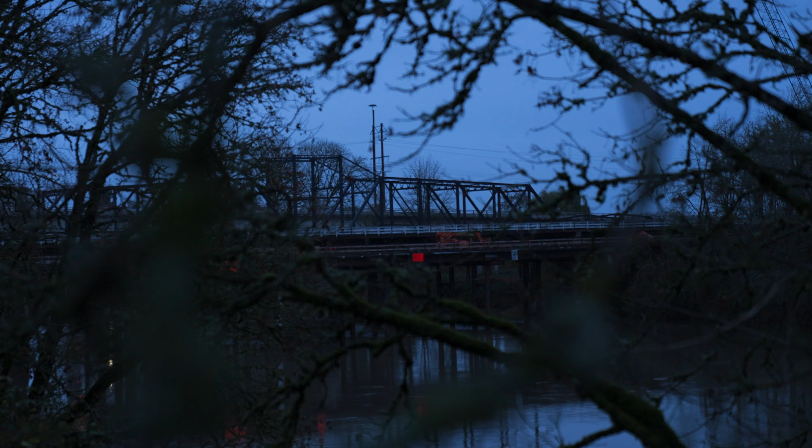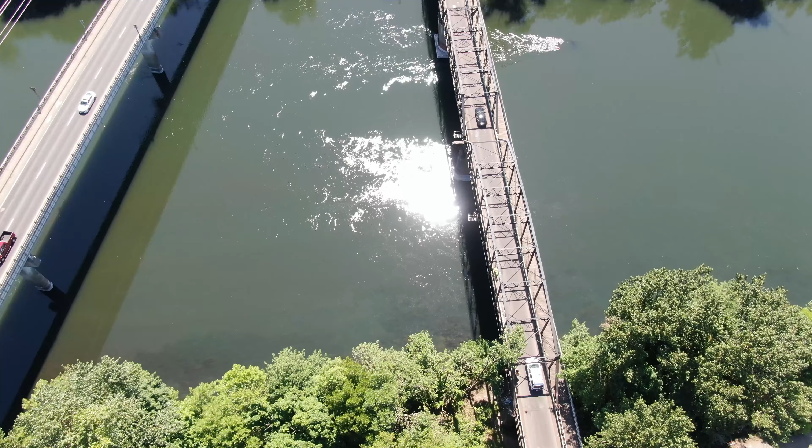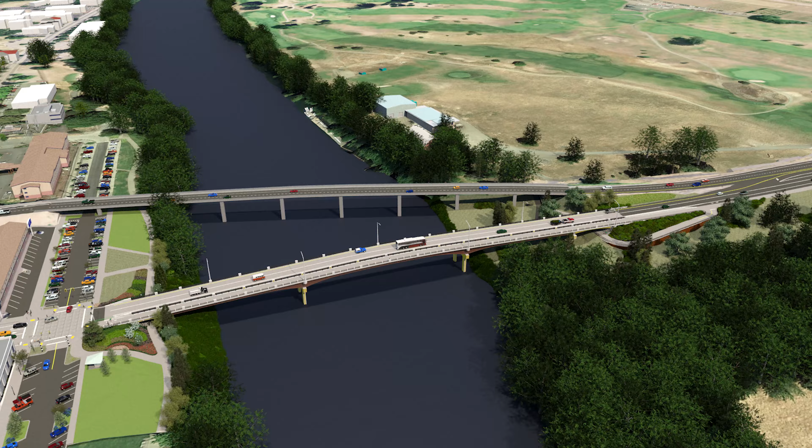When you're considering how to treat a historic bridge, I think you really need to start with what is the goal? What are you trying to accomplish? You have to start with, does it need more lanes for capacity to increase that opportunity value? Does it need a seismic retrofit in order to provide that security because it's an emergency route? Does it need more pedestrian facilities because it's providing connection?

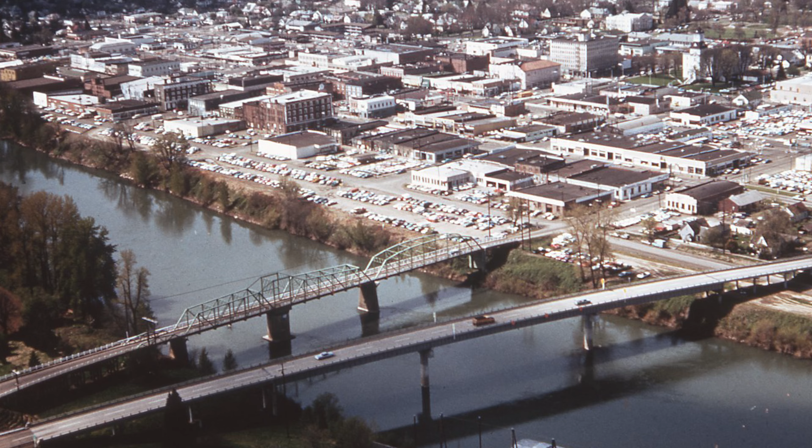You have to consider those things, but you also have to consider the value of it in its current, like what it looks like and what it means to the community, because that's part of your goal. Can you maintain that feeling in doing all those other things? And sometimes if you have to do all those other things, they just become so overwhelming that by the time you'd finished, you would have lost that feeling. And if you've lost that, then were you doing the right thing?

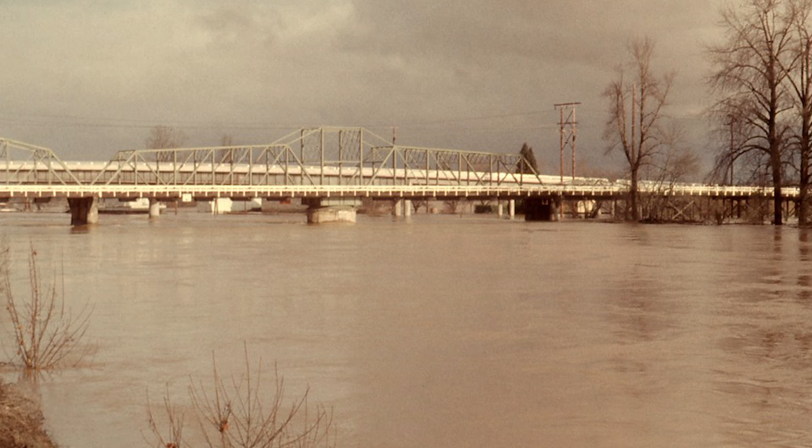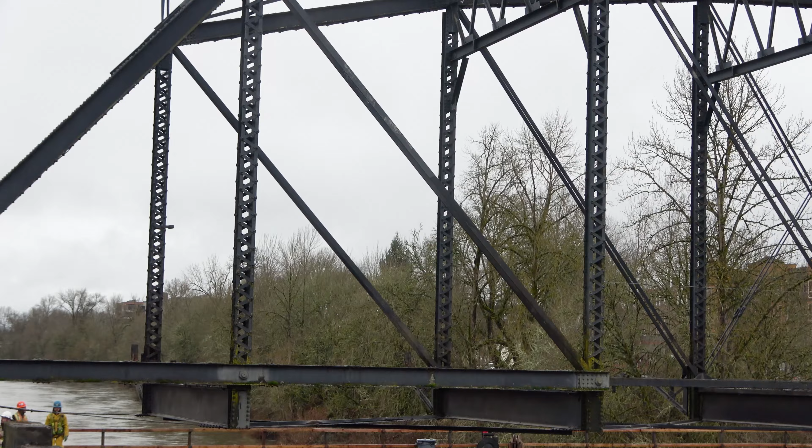The Van Buren Bridge, unfortunately, is made up of non-redundant steel tension members in some of those web diagonals, as well as the bottom chords. That design makes this bridge type a lot less resilient. Couple that with the west span, which has tension eye bars in that bottom chord, and together these make the Van Buren Bridge particularly vulnerable. If any one of these members were to fail, the entire truss span would more than likely collapse.

Trying to match that today, working on a historical side, you start to lose, you can't recognize the bridge as a historical bridge in the same way it was. And ODOT really took the effort to say, what would it take to take this bridge to make it seismically stable? Now, that also brings in the question of how much life do you get out of a bridge of this age to begin with.

So the challenge too, I think this was recognized by us, and I think largely recognized by the public and the community that we're working with, was that to make this thing continue as a vehicular bridge is really a fool's errand, because it would take so much work, and then you'd be only maintaining one lane.

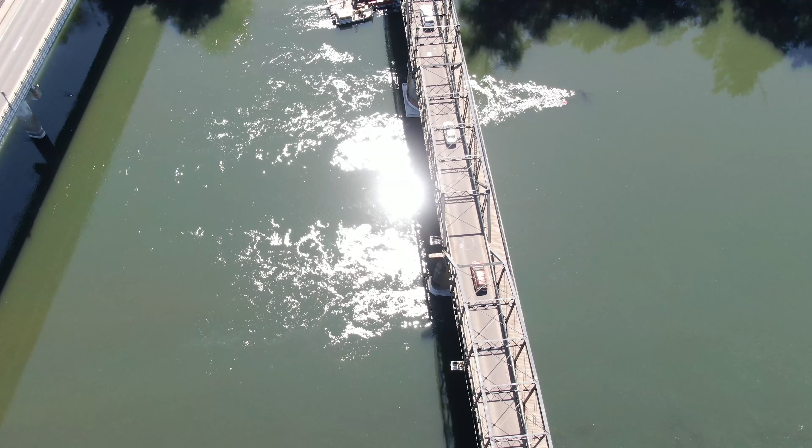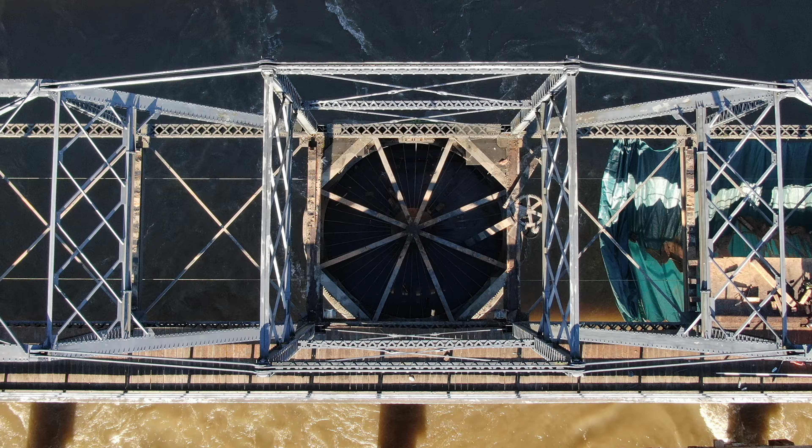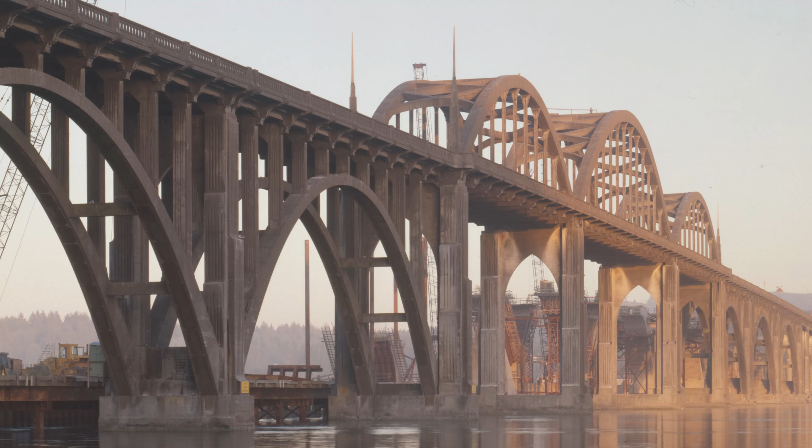The last time they tried to open it was in the early 1970s. So it's a swing span. The Coast Guard was saying, you need to be able to open this bridge on request within, and I think at that time it was a month. Okay, we're gonna test it out. They jacked up the ends, they started twisting it, and it immediately started to sag. And they ended up having to get a crane out to lift the ends back up to torque it back into place. And at that point, they took out the original bearings and fixed it in place and negotiated with the Coast Guard.

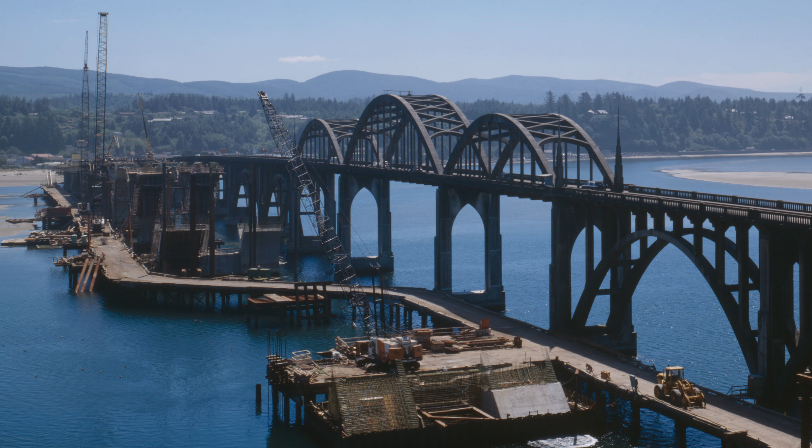ODOT has a preservation crew because of the loss of Alsea Bay Bridge back in 1991. We did a bunch of research and discovered this cathodic protection scheme that uses electrical currents to reverse the corrosion in a reinforced concrete bridge, like Alsea Bay was. They found the technology and started dabbling in it, but it wasn't in time to save that bridge.

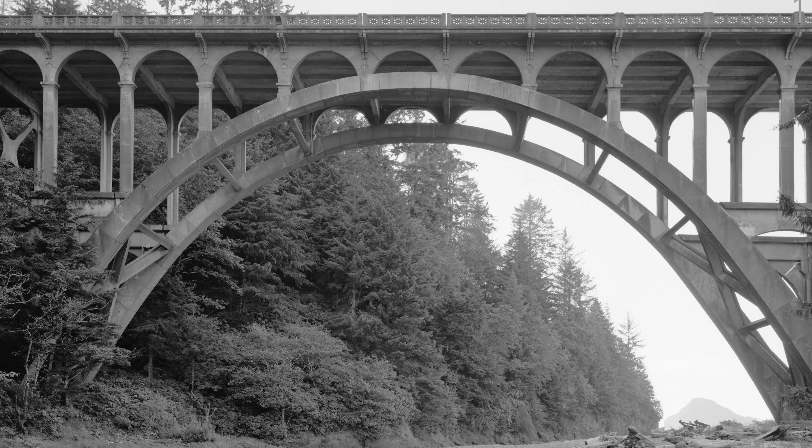But at the same time, they also started projects like Cape Creek Bridge just north of Florence, and actually executed that one perfectly, and that started basically the saving of all the other coastal bridges other than Alsea Bay, all of the ones that were designed by Conde McCullough. They're big and they're expensive and they're valuable both for historic purposes and also just for people to use and to get around.

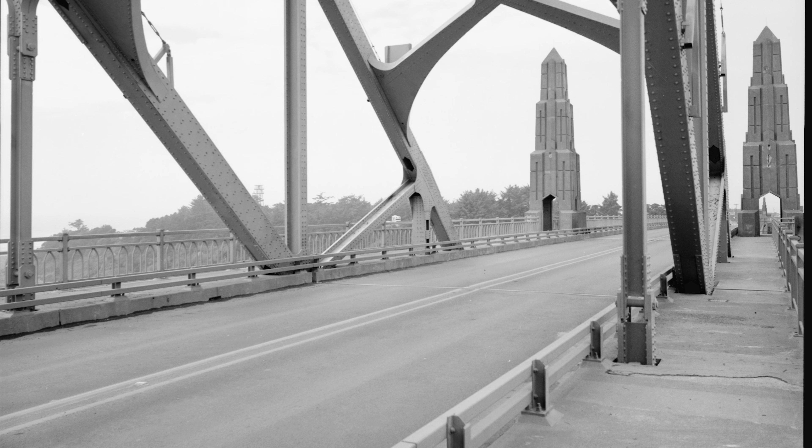And so, we may spend $30 million doing the cathodic protection on one of those big bridges, but replacement might be $1.5 billion. The purpose of that crew is sort of twofold. It's the historic mission, but it's also just economics.

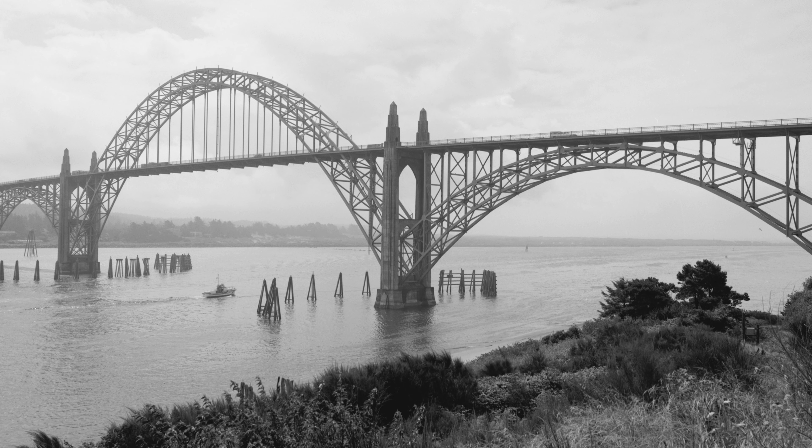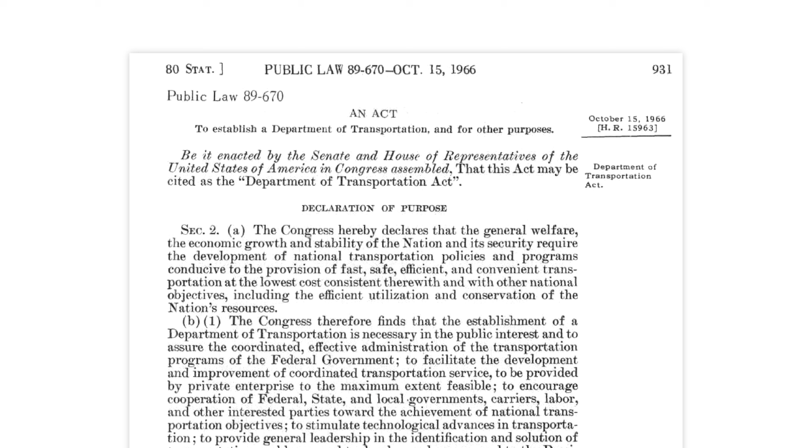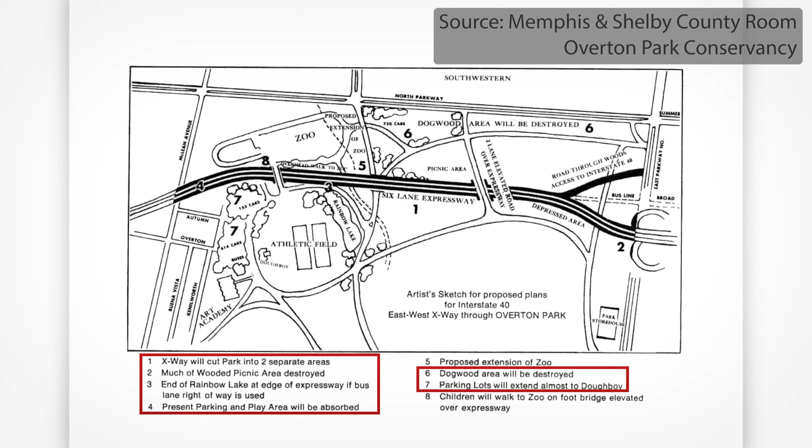The Department of Transportation Act of 1966, which essentially set up the DOTs, included a Section 4(f). This was signed on October 15th of 1966, where they recognized at the time there was a lot of hubris going on with the transportation agencies that were sort of blowing through downtowns across the United States, and they weren't really considering effects to downtowns, and they're sending interstates through cities. And so there was this pushback at the time to really look at what are we doing as a transportation agency to the historic fabric of our country, and what can we do to change that?

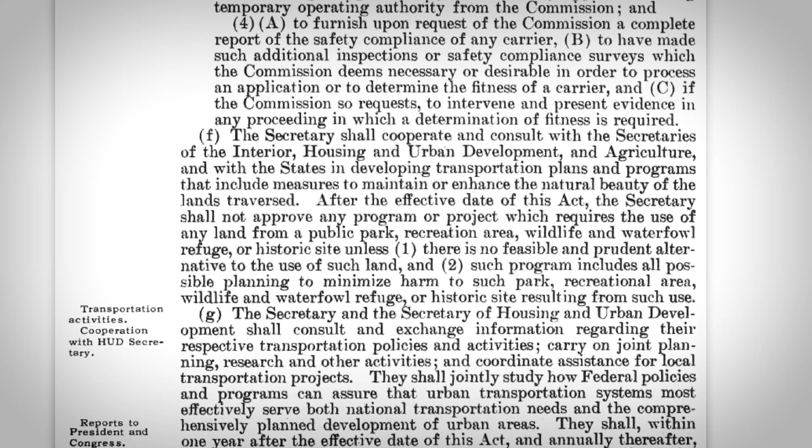So these famous cases in Overton Park and Brackenridge in Texas led to these laws, which really, I think, have done a great service for us to really do a hard check about what are we doing and can we do something differently here. So in this case, of course, this is a historic bridge.

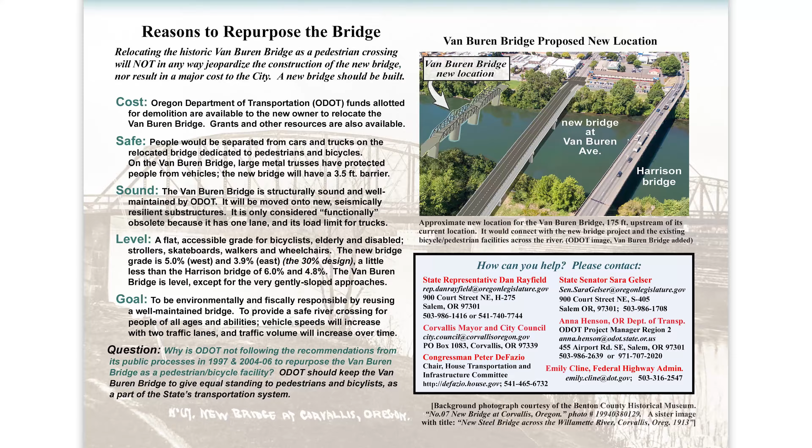That effort back in 2007 was really, hey, how do we make the bridge as sound as possible for the possible future? At the time, there was a really willing partnership, I would say, between the city and ODOT to look at opportunities for this bridge to possibly become a future pedestrian bridge. And so a lot of that effort was looked back on and said, what did we talk about then? What did we do then? A lot of that community was still in town and has participated in the current process.

But we as an agency said, okay, what alternatives do we have? So we actually looked at things like taking the bridge to the north, the Harrison Bridge, and making that the seismically stable bridge.

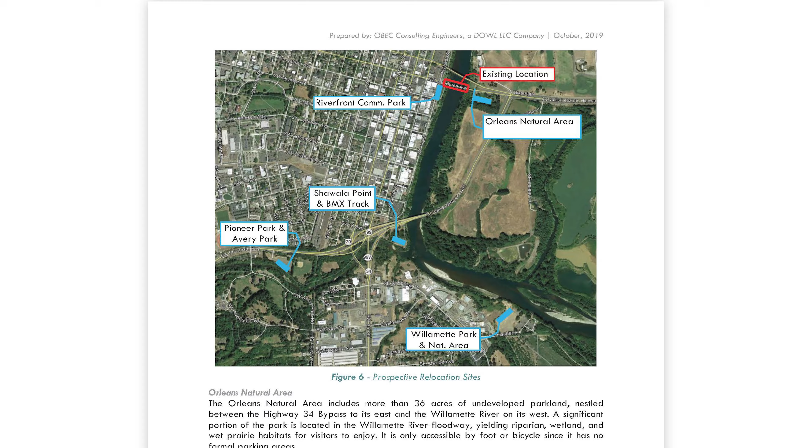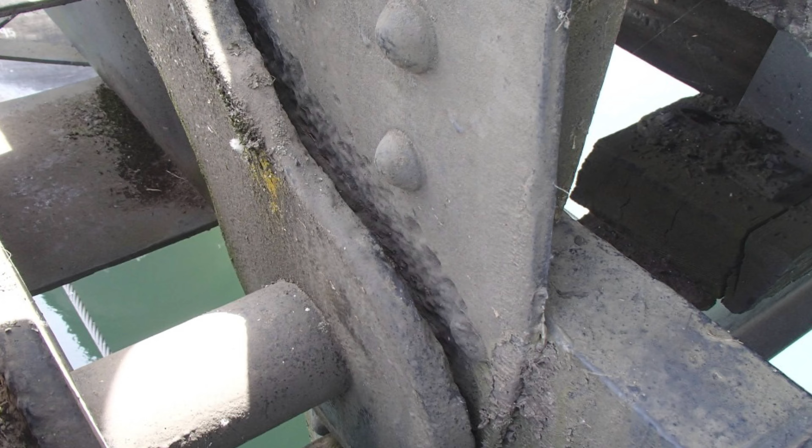So one of the biggest deterioration mechanisms we see all over the state, but especially on Van Buren, is corrosion. Corrosion is a process that's going to eat away at the steel over time. It's inevitable. We provide paint to protect as best we can, but in the crevices between the plates, there's not much you can do about keeping the corrosion out.

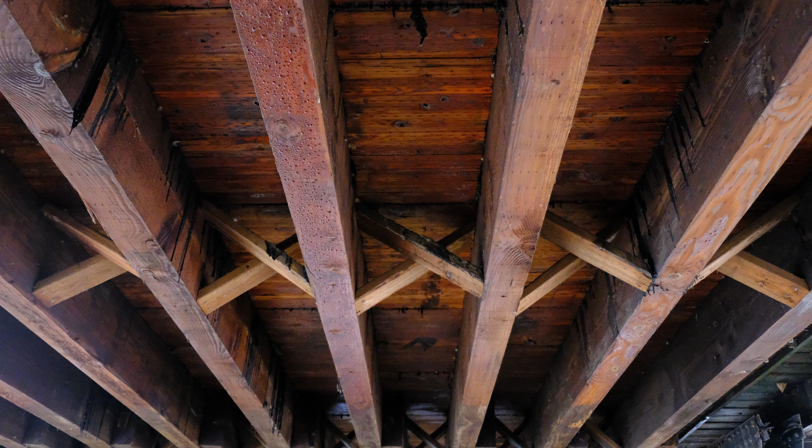The other mechanism on Van Buren is the timber deck. Timber exposed is going to always start to rot. And the only real way to treat those are with these very toxic chemicals that kill the things in the river as well. And today we would not be willing to put those over our rivers. And so keeping up a timber deck is hugely costly.

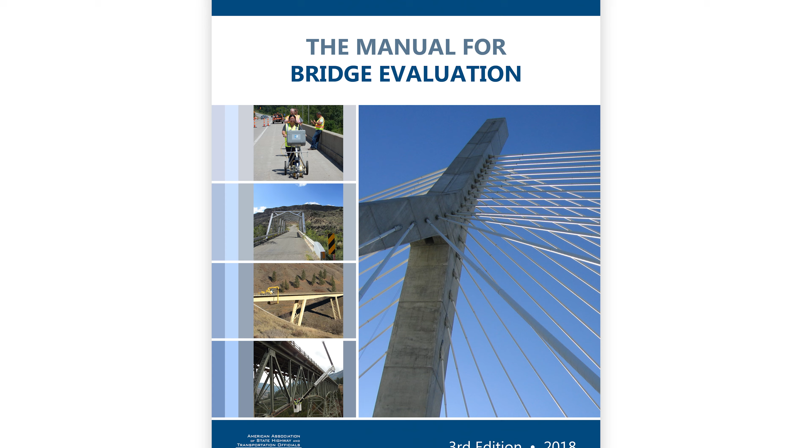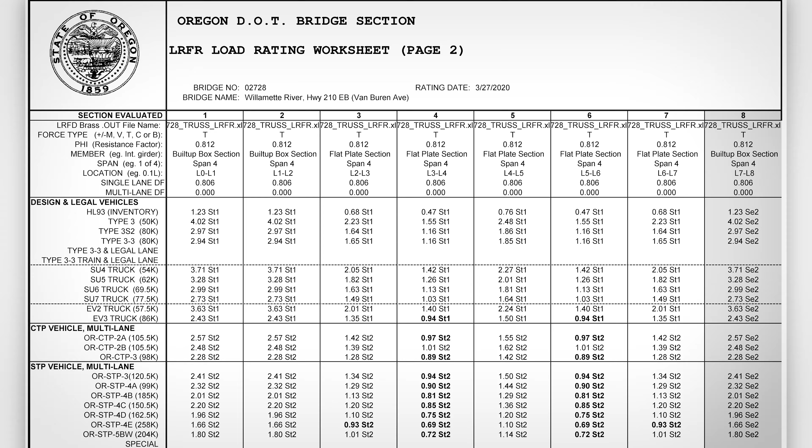So in the case of Van Buren, the biggest determinant was the load ratings. And so, for instance, in 2007, when we painted the bridge, it didn't look too bad. And so preserving it was a good decision. Then the load rating procedures evolved and got more stringent and looked at more details, for instance, the timber deck on this bridge. And as a result, it went from looking pretty good to looking poor.

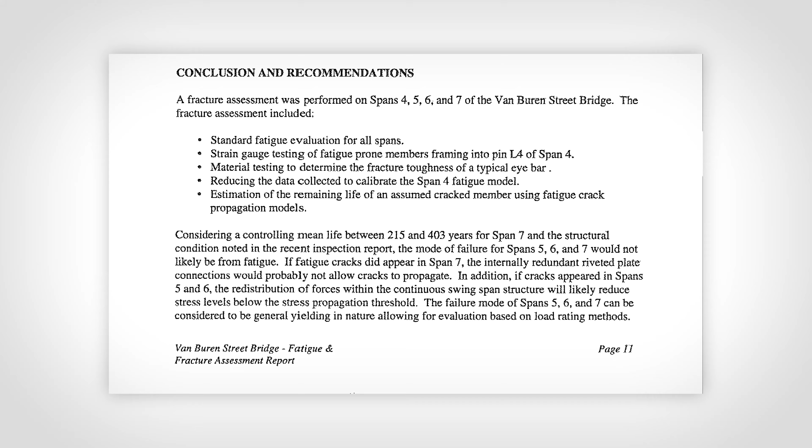My opinion, my impression, though, the inability to get around the metal fatigue issue and the non-redundancy is the thing that really took us to a place where we couldn't do something. The cost of rehabilitating versus replacing can vary hugely. And it really gets back to that same question of what is it that you're trying to achieve?

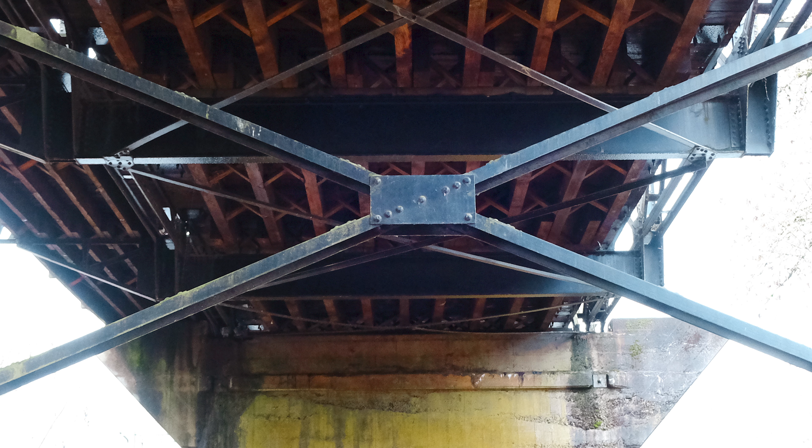And you're still going to have to build a completely new substructure for the bridge because the existing substructure is sitting on soup, effectively. It's on toothpicks and soup. And so you're having to build that entire same substructure. And if that's a big portion of the cost, doing that cost comparison is never going to work out great.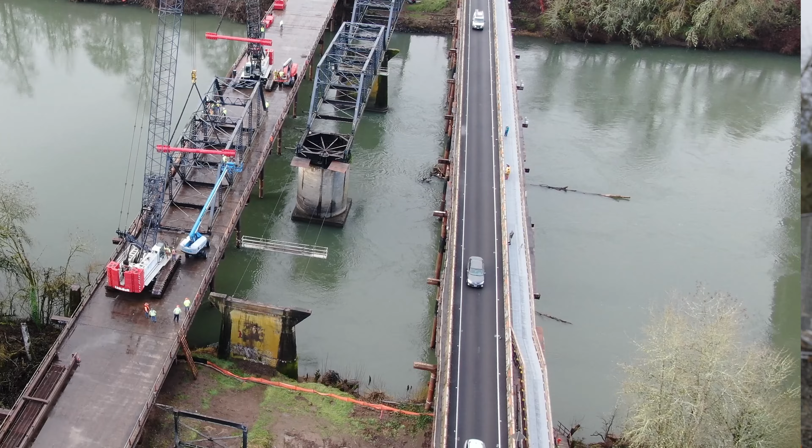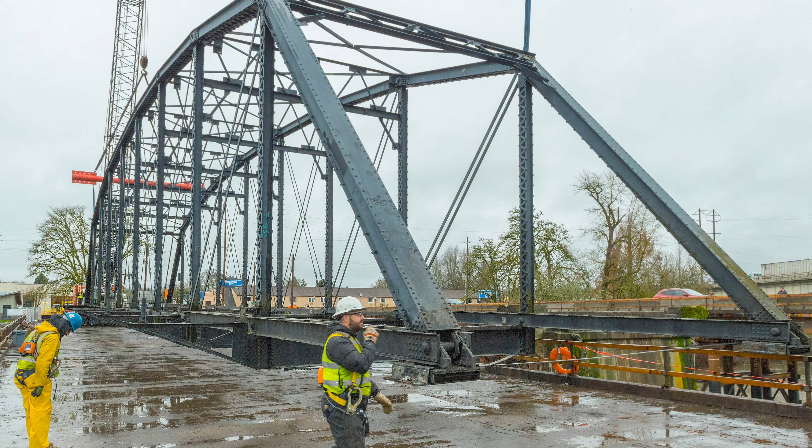It's going to require the construction of 2 temporary structures. One of the temporary structures facilitates the existing traffic, and then we've also constructed a 730-foot long by 40-foot wide work bridge, which is directly behind us, which facilitates removal of the existing bridge, including the trusses, the foundations, but it also facilitates construction of the new bridge substructure and superstructure.

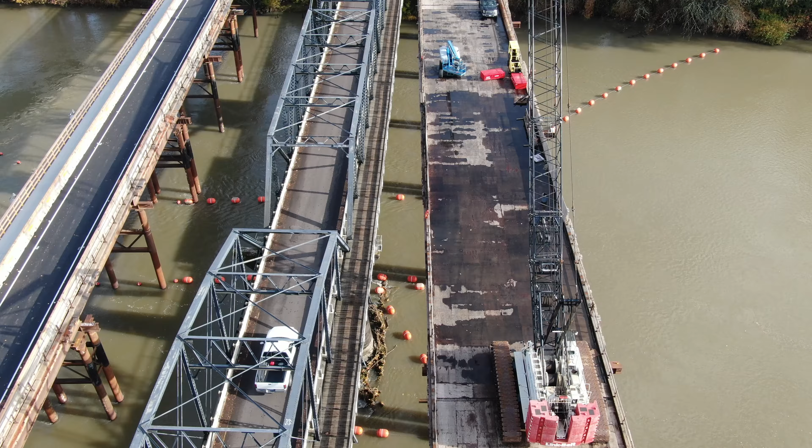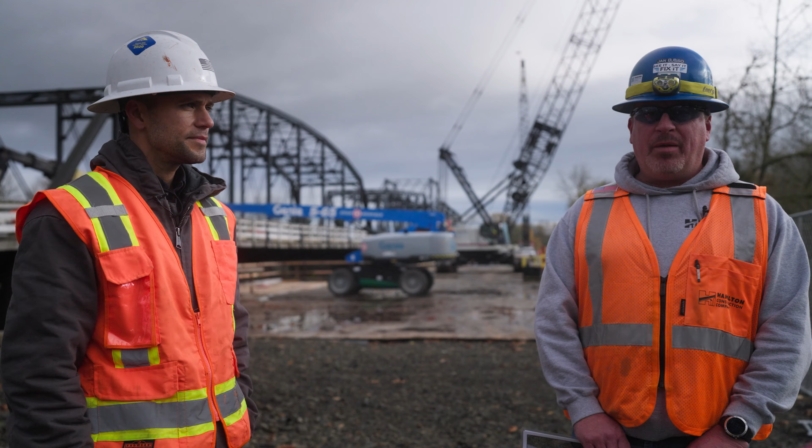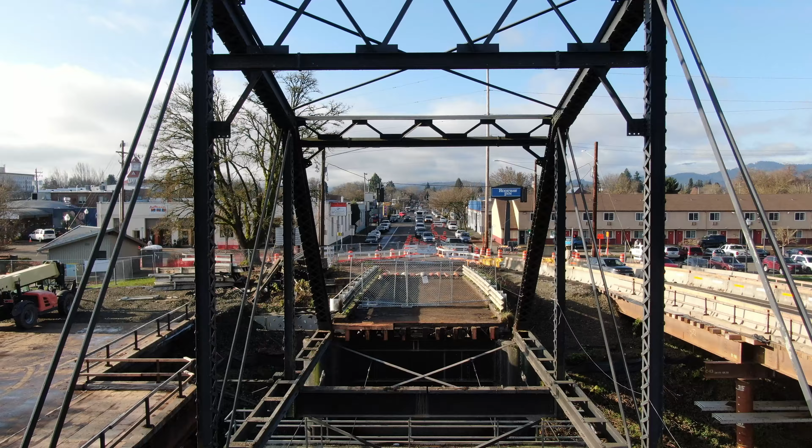So it basically gives us laydown area, access for our cranes, all of our equipment, and that would include the demolition aspect of it as well. The benefit of a 2-crane approach, number one, it allows us to use company-owned equipment. The first step in this process is to lighten the trusses up as much as possible, and that's removing all of the existing asphalt concrete and removing the timber decking, which you can hear the guys with the chainsaws working on right now.

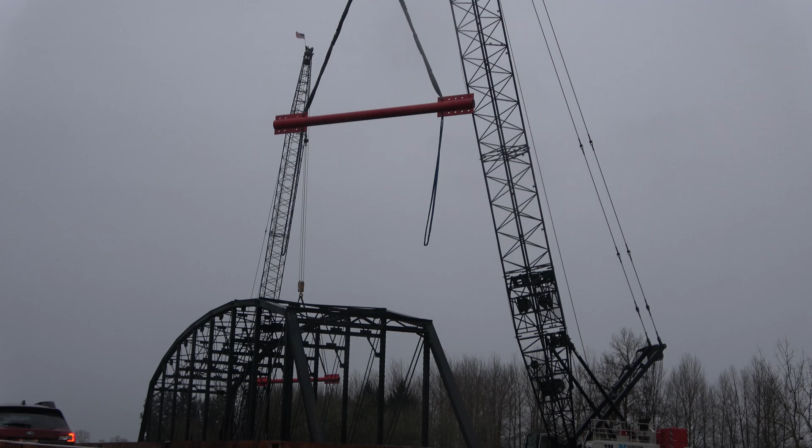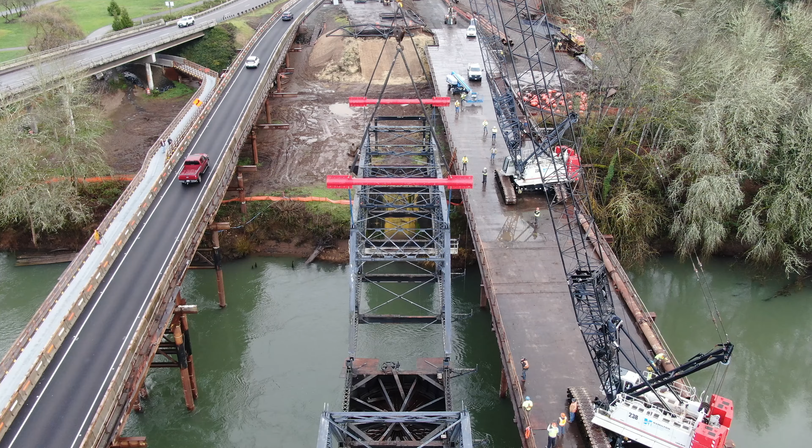Once we get the trusses, we call it skeletonized, to their basic components, we'll prepare our cranes, we'll rig the trusses with some pretty heavy rigging. We determine and engineer what our pick points are, and we'll physically attach our cranes to each end of the truss and pick it, hoist it, and then turn and set it down on top of our work bridge.

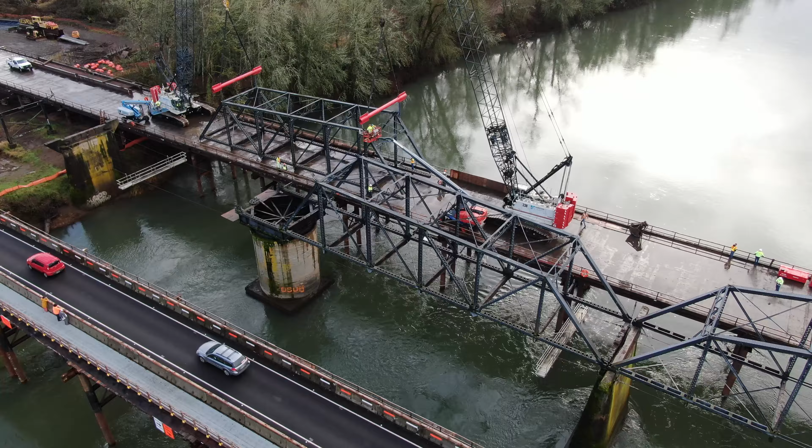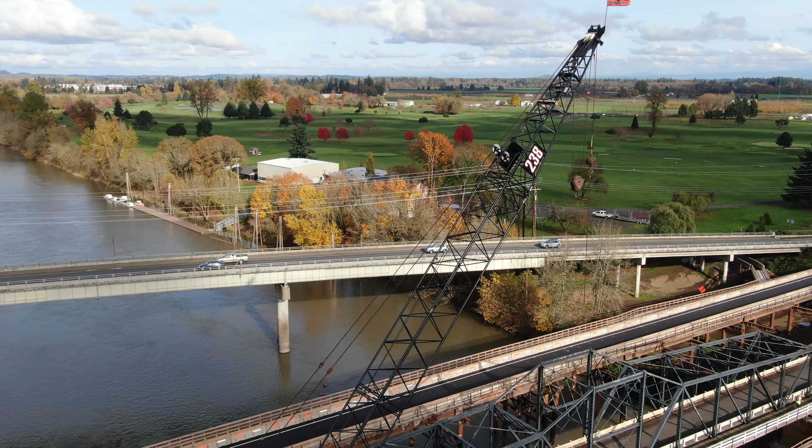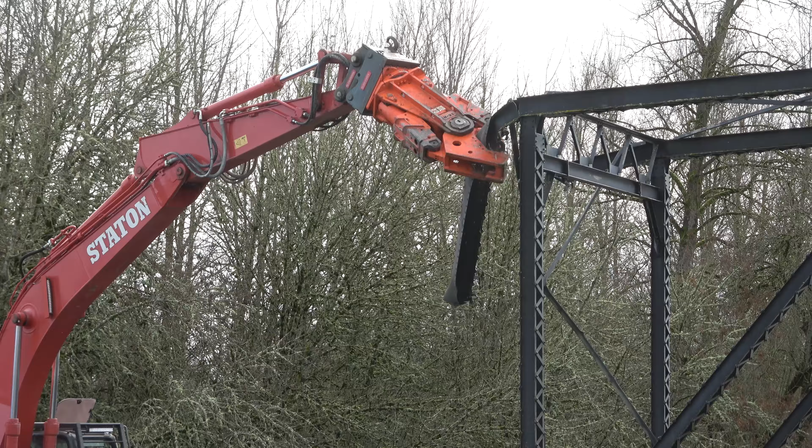And in calculating the weight of this truss, I think there's 4 or 5 different individuals that have gone through and physically calculated the weight of each and every component of the truss, and that allows us to size our cranes. All of our cranes have a certain capacity, a certain boom length, a certain turn radius, and so we have to design our work trestle or our work bridge to get within the pick radius of our crane. And then Staton comes in with their equipment. They shear all the steel components into smaller pieces that can be loaded into a truck and then hauled off.

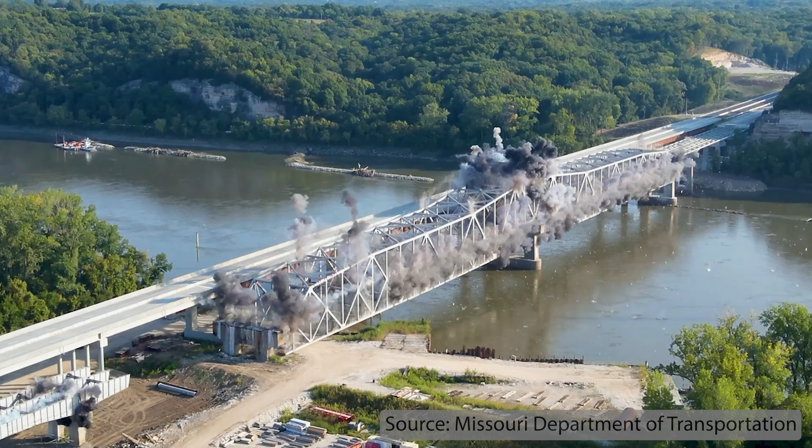So in the olden days, and I've been around in the industry long enough to remember, you could actually put charges on the ends of the truss, blow it up, drop it into the river, and then you just yard the thing out with a bulldozer or a winch cat, something like that. But permitting agencies don't like that. There's also windows in which we can be working, and that's predicated by migratory fish restrictions. And our in-water work window on this project is effectively June 1st to October 31st.

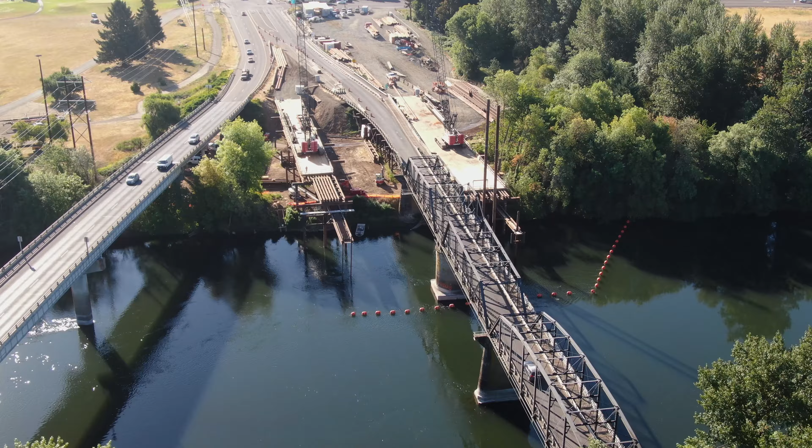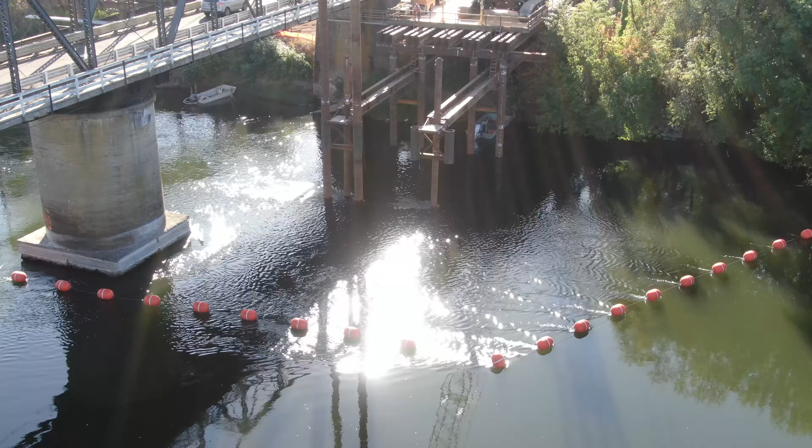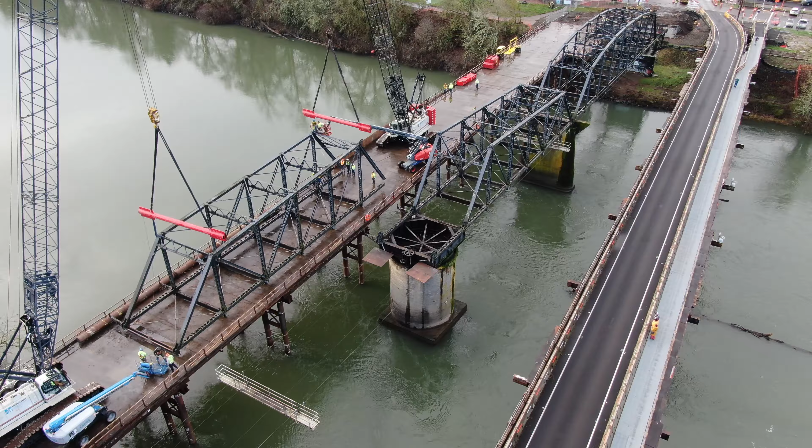So while we're outside of the window, we're doing as much of the removal as we possibly can without impeding the Willamette River. So we're staying out of the river. We've got containment in to contain any debris that might come off the structure as we're removing it. It's dangerous work. There's critical picks, extremely heavy lifts, because once we've got that truss picked and up in the air, we don't have the option necessarily to set it back down.

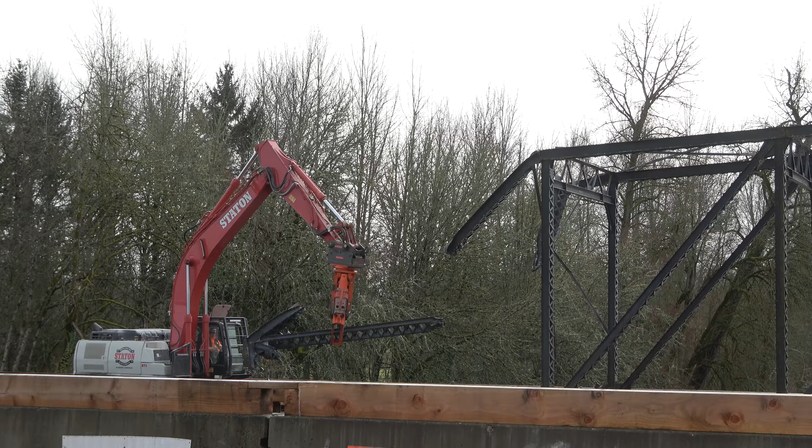We actually opened up a scrapyard at our facility, so we will be taking all of this steel and recycling it. The biggest challenge is getting it on the trestle so we can process it. And we essentially want to process it down to manageable sizes to be able to truck it. So we'll have shears processing it down to 20-foot sections and process it down even further.

So the timber was, I believe, governing the load rating, and the next most critical member was bending in the floor beam that supports those. That certainly is about cost benefit, and in the case of Van Buren, one of the tricky things was it's a pin-connected truss, and a pin-connected truss has some serious vulnerabilities in terms of redundancy.

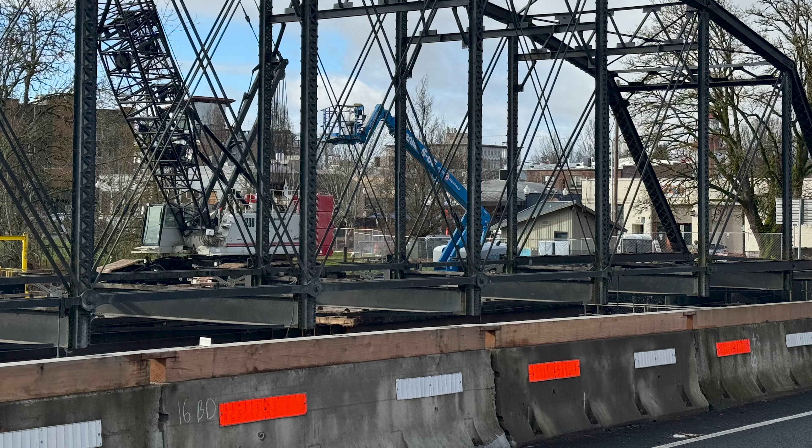That was okay in 1913. It's not okay today on the state highway system. And once we started thinking about that, the expense just went pretty crazy. So historic preservation is important, but taking care of the economic needs of communities is also important. Both contribute to the well-being of our communities.